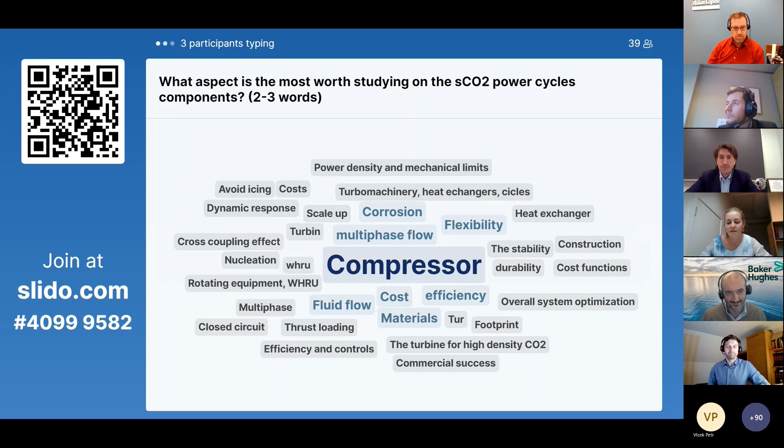For the time being, the cloud looks like a PR for the session, because we see the compressor is the winner, but it's not us, it's you.

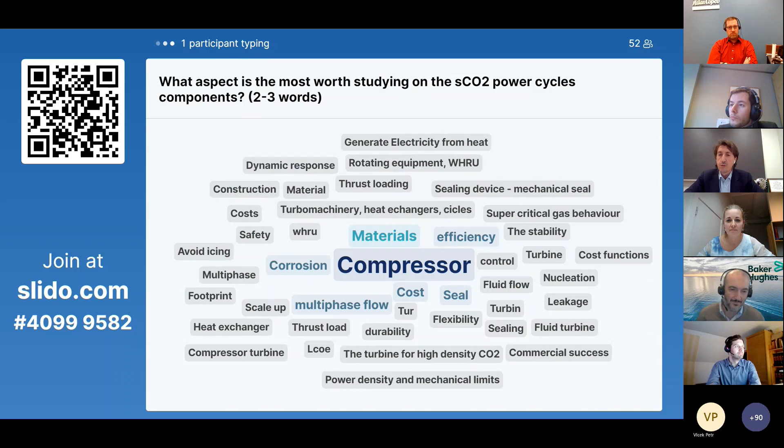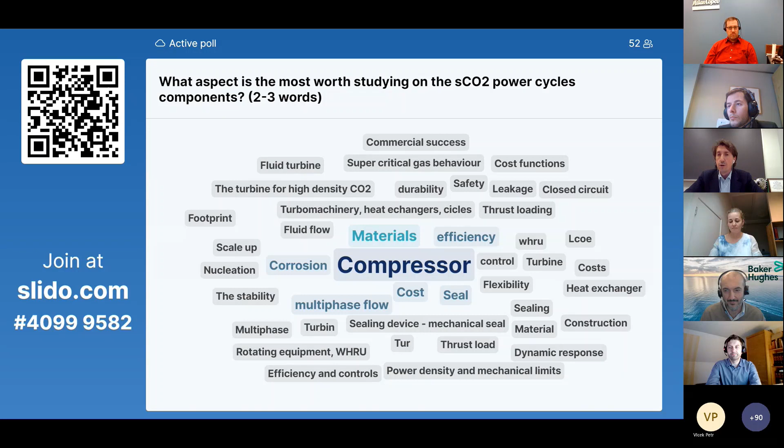My role in this webinar will be to introduce the challenges from the scientific perspective, and to leave the floor to Marco and Rasmus for their industrial experience on that.

It's nice to see that compressor is a big word here, showing that people are very interested in the topic. As soon as you say it's okay, Jitka, I can start sharing my slides.

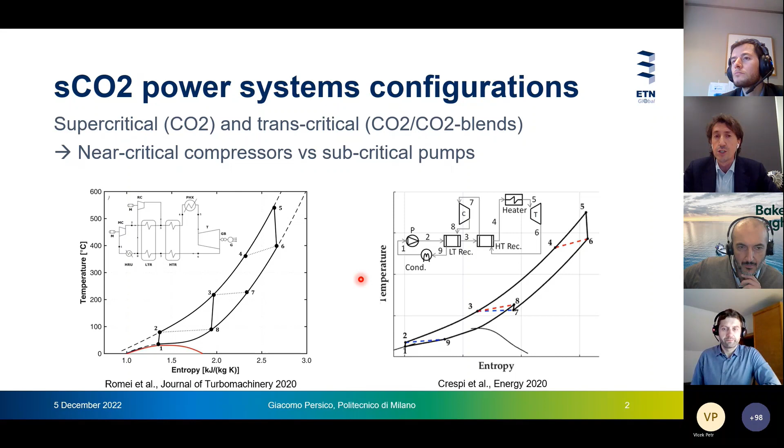The main difference between the two, among many other things relevant for our meeting today, is that in the supercritical case, compression is obtained in a near critical compressor, while in the other configuration, the increase in pressure is obtained by a subcritical pump.

Focusing first on the supercritical case, the near critical compressor configuration is basically a Brayton cycle, single phase, closed. The key idea for the success of this cycle is that compression occurs close to the critical point, reducing the compression work.

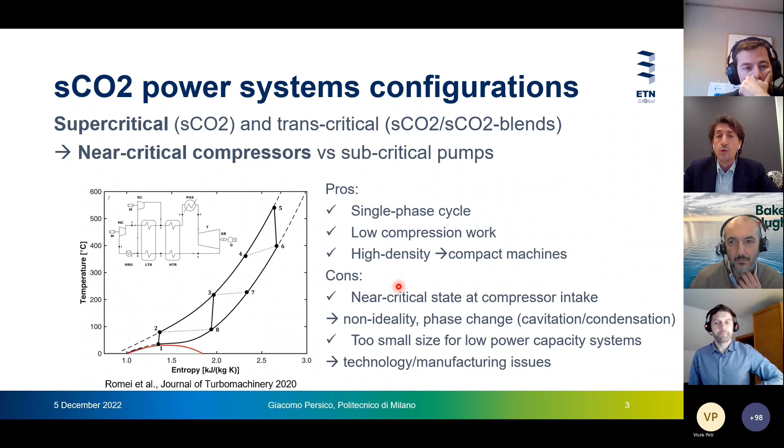This also means we deal with high density fluid, implying compact machines of small size. But this can also become a problem because the near critical state at the compressor intake introduces thermodynamic challenges. Also, in case of low power capacity of the plant, this leads to a very small scale machine, which can be problematic from the manufacturing point of view.

If we consider now the transcritical cycle, it is basically a Rankine cycle. The work to increase pressure is even lower because it is done in a pump, and the presence of a pump offers the opportunity for standardization of the component. Moreover, the use of blends with CO2 allows changing the critical state and extending the application of this kind of cycle also for high ambient temperature.

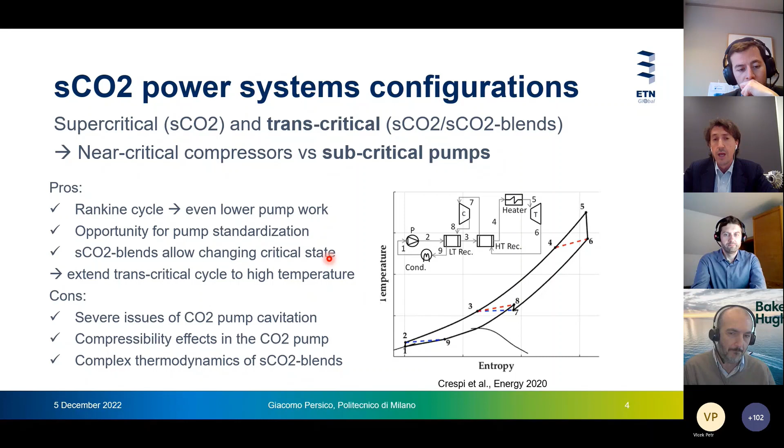However, from the point of view of the cons, focusing on the pump, we can imagine issues with cavitation of this CO2 pump, especially in case of blends, and also compressibility effects. But we will come back later to these aspects.

Let's start speaking about sCO2 compressors, from the basics as much as possible. We are all used to operating with ideal gases that obey the ideal gas law from the volumetric point of view, and whose thermodynamic behavior is summarized in the coefficient gamma, the ratio of specific heat capacities.

However, this parameter for ideal gases is also equal to a quantity which is some kind of an index of compressibility, also called K. But we said that the idea in our case is to operate close to the critical point with the compressor.

Close to the critical point, the thermodynamic behavior of the fluid deviates from the ideal one, and we measure this deviation, this non-ideality, through a parameter Z, which is much lower than one close to a critical point. You can see here the regions where Z is smaller than 1, and it is much smaller close to a critical point. However, this is not the only thing.

In that region, the compressibility index K is different from gamma and depends on the thermodynamic state, growing as entropy reduces. We can even prove that K replaces gamma in the relationship between the head coefficient of a compressor and the pressure ratio of the compressor.

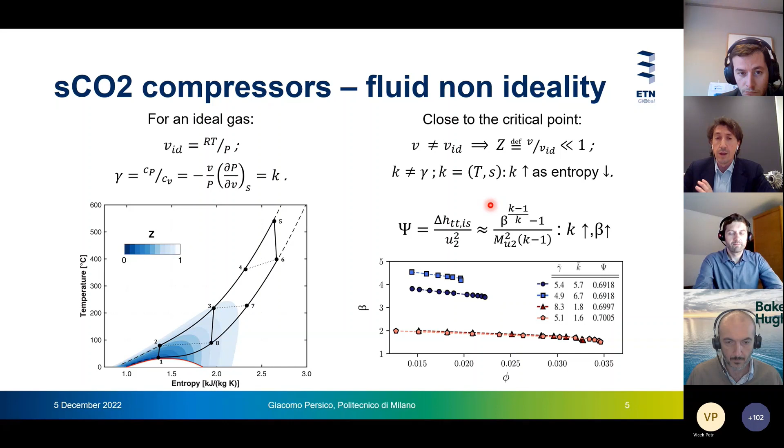We will come back later on this point, but this is not the only thing relevant for these cases, because working close to the critical point also means working close to the saturation curve. In this case, due to local expansion and acceleration at the intake of the compressor, we can have the thermodynamic state dive into the dome, promoting phase change, especially cavitation, or if you start from a high entropy condition, condensation.

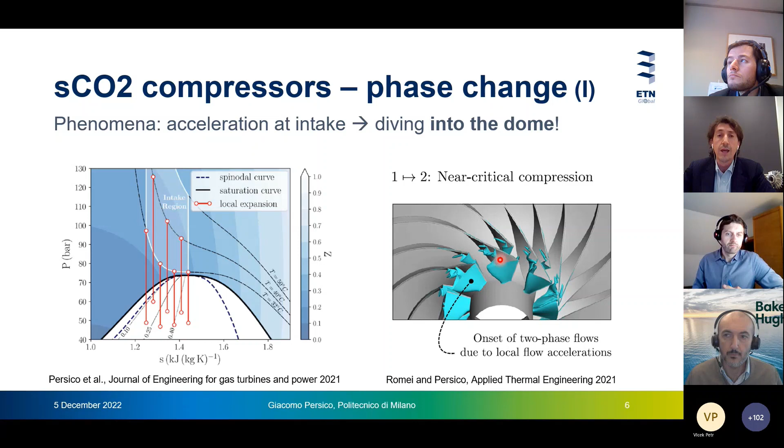You can have situations like this one represented here, with regions of single phase flow and other regions close to the blades where acceleration induces phase transition. Phase transition has a lot of impact from the structural point of view, but also from the thermodynamic and fluid dynamic point of view, because a phase change also involves a huge drop in speed of sound.

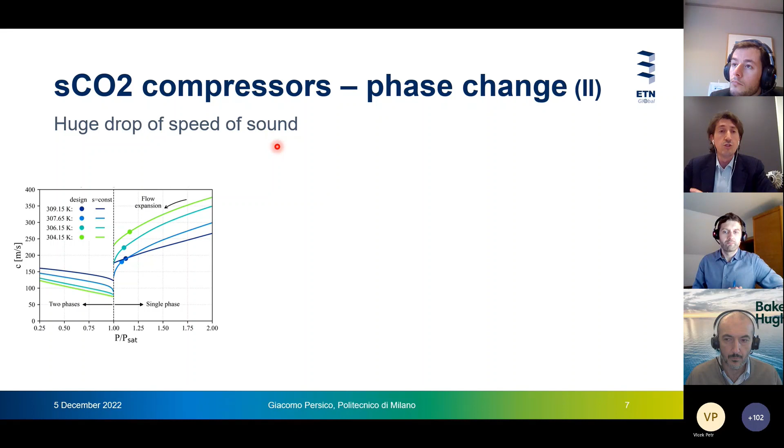This drop in speed of sound creates a huge rise in Mach number and can actually produce anticipated choking, which has an impact on the compressor rangeability.

Here you can see experimental and computational results on 2 megawatt scale compressors tested in Europe and in the United States: the SCO2-FLEX compressor and the Apollo compressor. For both of them, experiments showed a huge change in the rangeability of the compressor, passing from a far to near critical state.

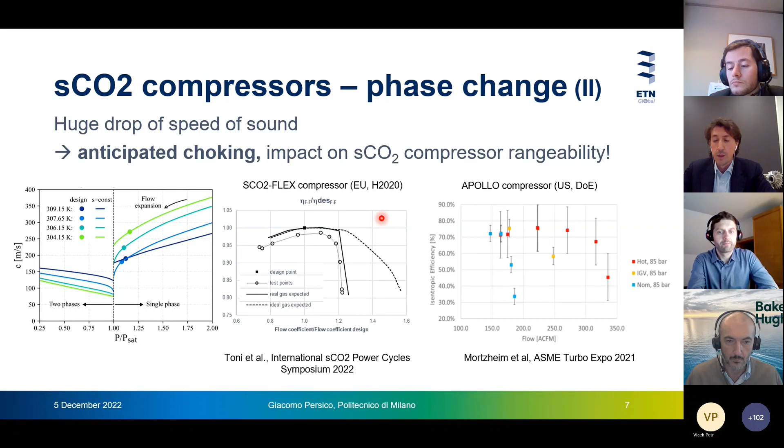So if we summarize all this information, the take-home message is that the thermodynamic state at the intake of the compressor has a huge impact on its behavior and operation from several points of view.

We did, for example, a study in which we considered for a single compressor 4 different operations: on the left, liquid-like; on the right, vapor-like; on the top, supercritical; on the bottom, subcritical. The same compressor operated in these 4 conditions produces very different operation maps and a very different compression ratio.

This is due to the change of the parameter K we introduced before, moving along that area, and to differences in the efficiency of the compressor due to changes in the flow field and velocity triangles, and also a huge change in the extension of these curves, meaning differences in rangeability due to phase change.

So all these things must be mastered when a supercritical CO2 compressor must be designed and operated in practice.

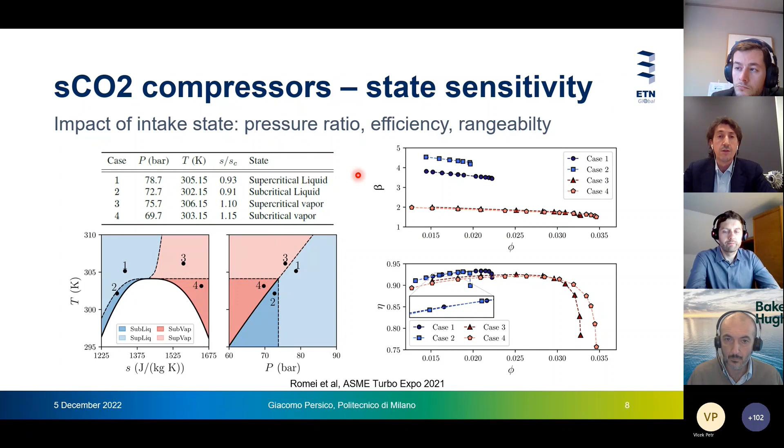However, these thermodynamic aspects are not the only aspect we should consider, because there are also technological considerations to include in our analysis. These things will be discussed in much more detail by Marco and Rasmus afterwards, but I will give you some ideas.

These are basically machines that operate with a fluid at high pressure and low temperature, so they become compact machines operating with low volumetric flow rate. In several cases, the most efficient configuration and architecture is radial, and this even requires specific strategies for low flow-function impellers.

In these machines, we can imagine limited pressure ratio per stage, around 2, and even considering the high density, this turns out to be a relatively acceptable level of mechanical stresses in the absence of creep effects. This allows the use of relatively conventional materials, even though some supply chain issues can occur, especially presently.

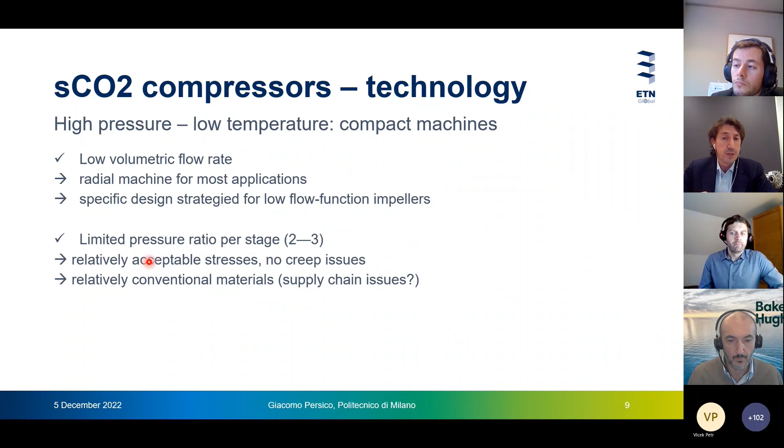But the most challenging aspect is that moving from far from the critical point to close to the critical point, the size of the machine greatly reduces. Because of that, manufacturing issues can arise, for example in the dry gas seals or in the surface roughness.

So the question arises: is there a minimum compressor size that is feasible, and does this produce any limit in the minimum power capacity of a supercritical CO2 system? All this consideration...

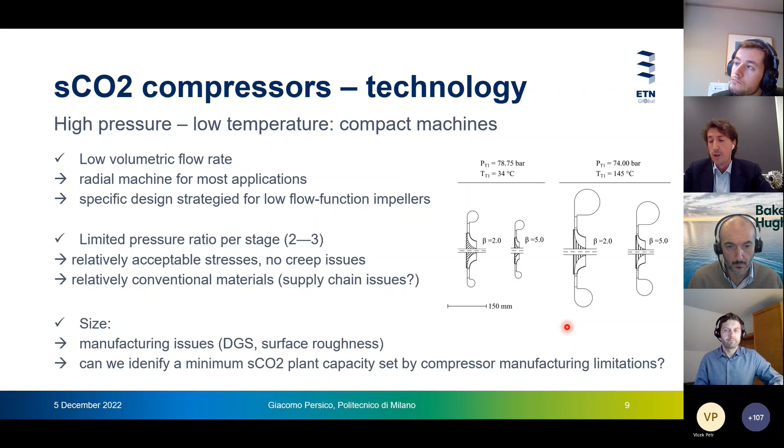leads us towards some kind of possible classification for the selection of CO2 compressors. This was originally proposed in the chapter by Musgrove and Wright in 2017, in which they identified 4 ranges. For power capacity of the system below 1 megawatt, we have very compact, very fast machines.

So the question arises if this is really feasible. For power capacity between 1 and 10 megawatts, machines are compact and fast, but still feasible. This is a very interesting area of application, for example for waste heat recovery.

As we move towards higher power capacity, axial compressors also start to become interesting and relevant, especially above 50 megawatts, and above 300 megawatts it seems that only axial compressors are effective. So the first question is, are these thresholds reliable?

This is something that needs technological research and development, but it also opens the way for other questions. When we think about axial compressor applications and configurations combined with high density of the fluid, the question arises on how these machines, especially the blades, can withstand such aerodynamic forces. Should we think of novel profile shapes, thicker profiles that are still efficient? As a further consideration, when the power is so high, could it be more interesting to consider pump-based transcritical cycles, since they inherently don't suffer from this scale effect?

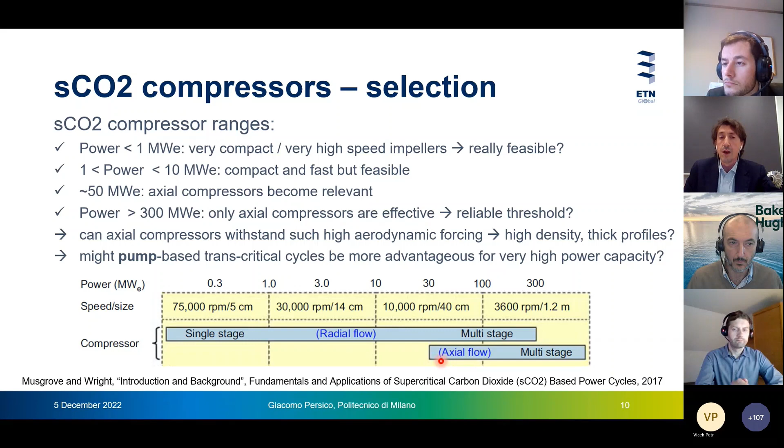This question leads us toward the discussion of the challenges about pumps operating with CO2 and CO2 blends, which are devices that can be quite different and more complex with respect to the CO2 compressors.

They operate with a sub-critical fluid in liquid-like thermodynamics and still have issues of small size. Focusing first on the thermodynamic aspects: yes, they are liquid, but in a compressible liquid condition. Issues can arise thermodynamically since the machine operates in a region not very consolidated, especially for CO2 blends. Also, change of phase can occur here, but in a different way.

With respect to what we've seen for compressors, cavitation can occur in both, but for CO2 pumps this cavitation is different because the fluid condition is subcritical. The specific volume of the vapor is much bigger than that of the liquid, and the bubbles are not dispersed, so their implosion can become critical for the resistance of the material.

We need to develop criteria to avoid cavitation, but this requires more research, especially for blends that have novel thermodynamics. From the technology point of view, pumps also share the problem of small size, so the same question that arose for compressors applies here too.

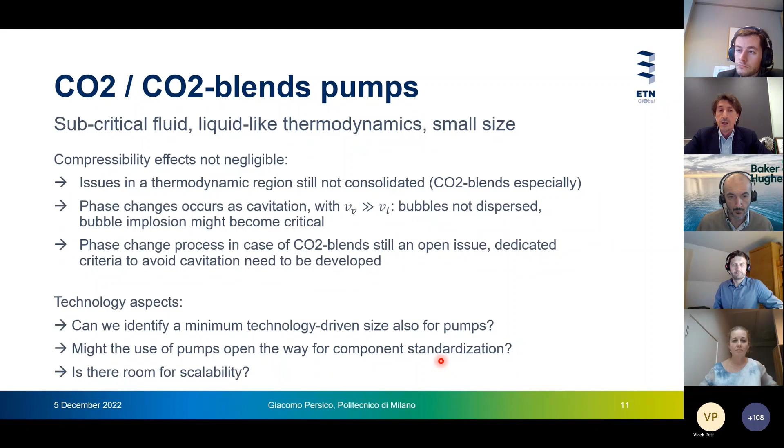What is the minimum size? But we should also consider that from a techno-economical point of view, pumps offer opportunities for standardization and scalability. These are both aspects that should be explored in the future.

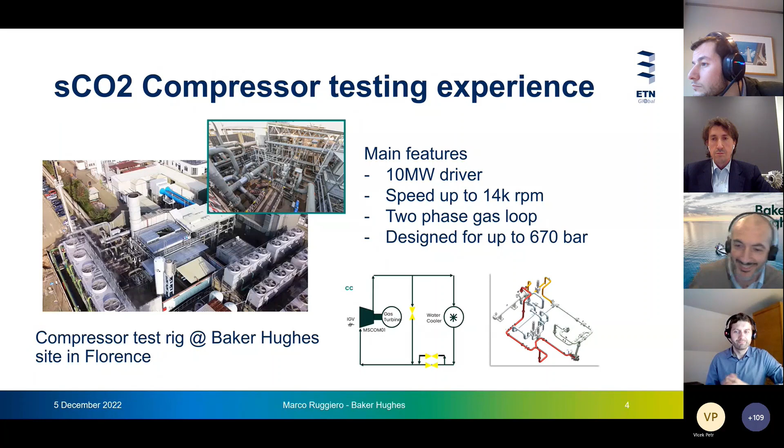So the compressor that we tested had a couple of features very innovative for the type of CO2 compressor we were used to seeing. The first being that it had a stacked rotor. This is something we have done before, just to mention one of our other products, the high pressure ratio compressor, which has a stacked rotor using Hirth connections. But for a configuration like this barrel type compressor, it was the first time we did it.

It was also interesting to see how it played out, especially looking at leakages for a compressor which, even though it's 5 megawatts, is overall rather small — how the leakages through the rotor and the tie rod would play out.

We also have a variable geometry IGV, which is not entirely common in this type of compressor. This was done to fulfill the idea on the project to achieve a very large operating range for the compressor. This would be achieved by using IGVs and the variable speed motor. Using a combination of the two let us get in between 20% and 100% of the operating range of the compressor.

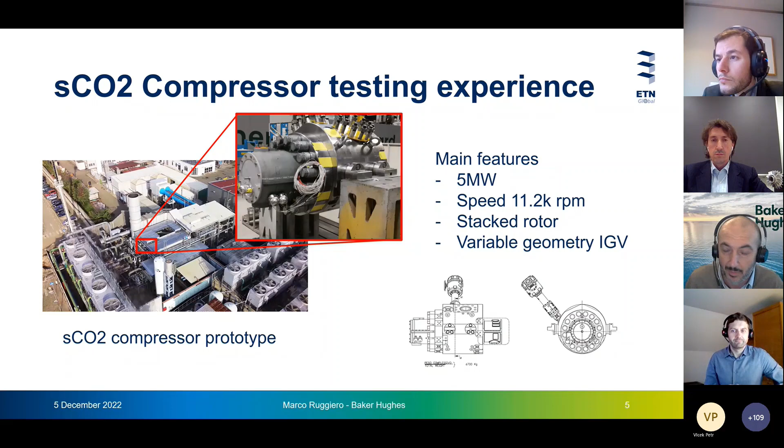So what did we learn? We learned that the suction control temperature is critical — this might be something already known, but even variation in ambient temperature due to the time of day is critical. There is an inertia in the cooling media. We used water mist type coolers, and it was not very hard or impossible, but took some attention to maintain conditions, as a small swing in temperature can have a very large swing in density, meaning you go off the map as you operate the compressor.

Giacomo mentioned the modeling we've done together for the CFD simulation. The results from the extensive campaign did really agree a lot with the theory behind those simulations. We're pleased that we not only now observe the behavior, but also already have a model for it. This kind of predictability is what we always look for when designing new stages for a service like this.

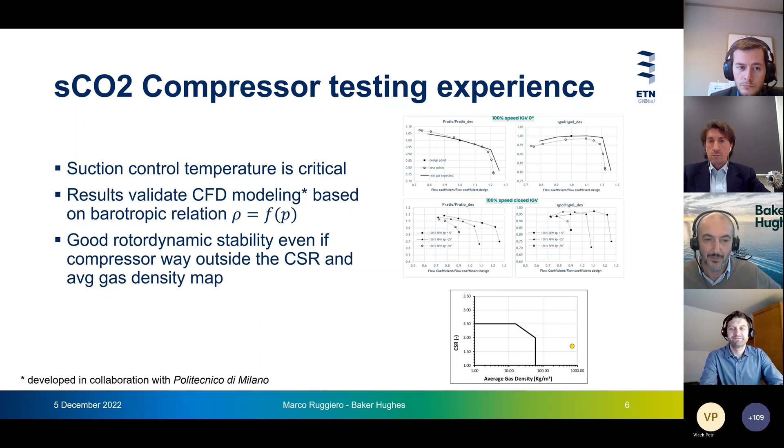So what are the challenges? What we see as a challenge for a Brayton type cycle is maintaining compressor inlet temperature, not only through ambient changes but also load changes, as the cooling media inertia or the exchanger itself might lead to transients that take you away from the point of optimal efficiency.

There have been proposals to use density as a controlling parameter instead of pressure or inlet temperature, but so far the ways of measuring density with accuracy in such conditions are very limited. That's one challenge that we, as a compressor manufacturer and operator, would gladly welcome a solution to.

The effect of saturation condensation that Giacomo described, during the design phase, forced us to develop a new aero configuration which also includes splitter blades to address and ride out the effect, and be able to properly design the performance of the unit.

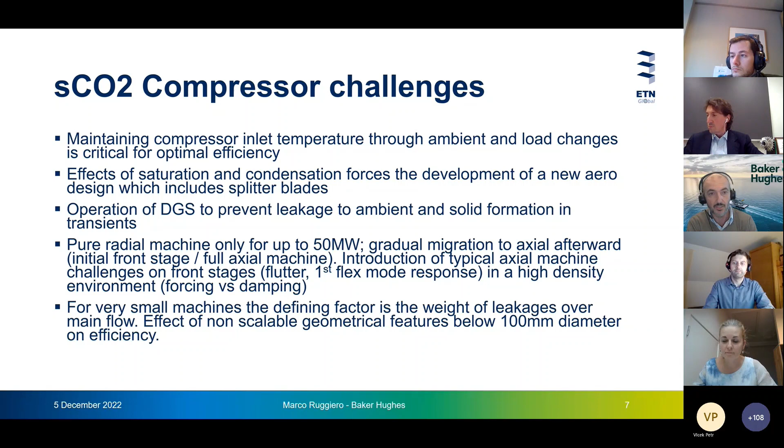Marco, I need to say that, but I'm afraid you'll need to conclude. Yeah, okay.

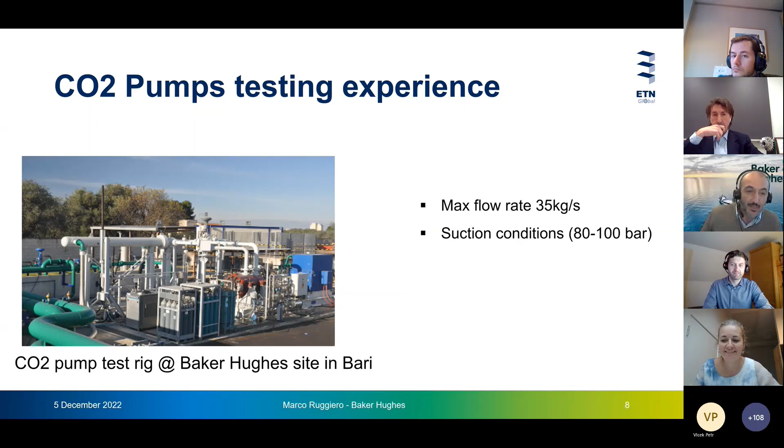So let's look at the pumps. Pumps as an item still have a not well characterized EOS in the liquid-like region, which makes it challenging in designing. There is a high density variation through the pump, and that's also a challenge for the pump itself. Inlet conditions need to be properly designed in order to avoid cavitation, which might be catastrophic for this type of machine.

For scalability, we see an upper limit of about 1500 cubic meters per hour as a volumetric flow due to size and forces, but also a limited scalability downward below 300 specific speed, as we change type of pump, basically it becomes a volumetric pump. The same applies for non-scalable geometric features below 100 millimeter diameter.

So the conclusion is that we have consolidated experience in SCO2 pumping. I didn't mention it as I jumped on the slide, but this is a typical application for enhanced oil recovery. We have been producing this type of pump for a while, not for blends, but for pure CO2, yes. So it's something that's on the market, and something we have experience with.

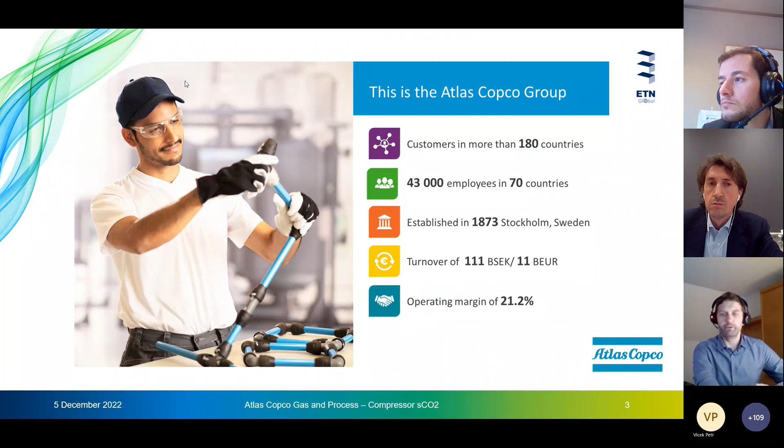Atlas Copco has a pretty wide product offering, from mobile compression, to vacuum technique for the semiconductor industry, to air compressors that probably everybody knows. We are part here of the Atlas Copco Gas and Process division, meaning we're the tailor-made equipment suppliers, let's call it the retail store.

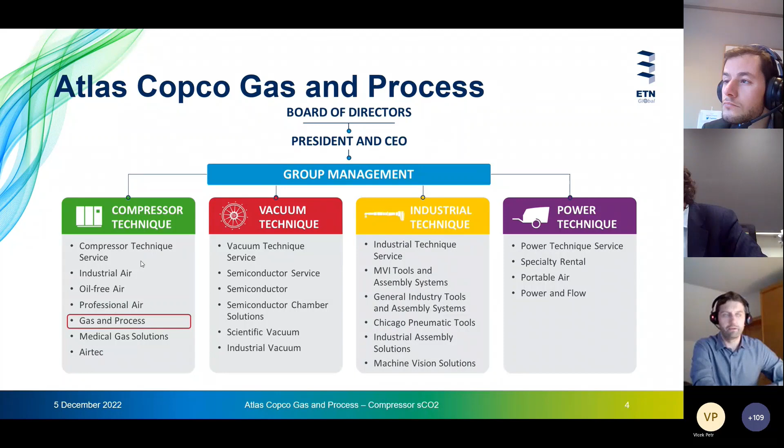Okay, so we learned already a thing or two about sCO2, and especially when the previous speakers were mentioning the differences between sCO2 turbomachinery design and normal machines, you can get this by comparing sCO2 with air at the same pressure and the same temperature. So just say 74 bar, which is slightly above the critical point of CO2, 31 degrees Celsius. Then the air has a density of 85 kilograms per cubic meter, whereas the sCO2 is at nearly 500. So this means roughly 5 to 6 times heavier.

And the second nasty property of sCO2 is the fact that it can diffuse into elastomerics. And once it's in there and pressurized, and you depressurize the system, you can have explosive decompression.

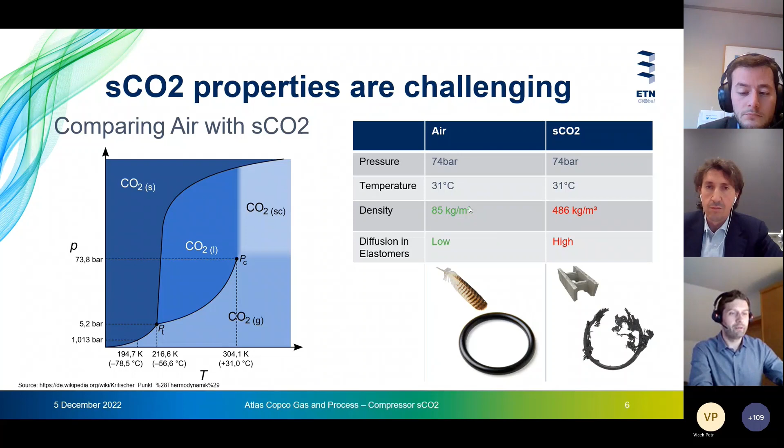This is something you want to avoid, because otherwise you have to replace your static sealing elements every time. So air is like a feather, and sCO2 is more like a brick. The properties for these elastomerics also have to be very finely tuned.

So we learned already by now, it's not just another gas. If you compare the typical turbo compressors and expanders we do, and other suppliers do, with sCO2, you see that our machines average from 0 to 50 bar, while the sCO2 machines would go from 30 to 300 bar and even beyond, as Marco just said, 600 bars. That's something you need to have for the system to operate efficiently.

Temperatures can be low on normal machines, but with sCO2, especially in waste heat to power systems, they will be really high because, again, Carnot's law: the higher the temperature, the higher your efficiency. Power is comparable, but at the same time the impellers, as we already learned, will be much smaller on the sCO2 because the density is higher.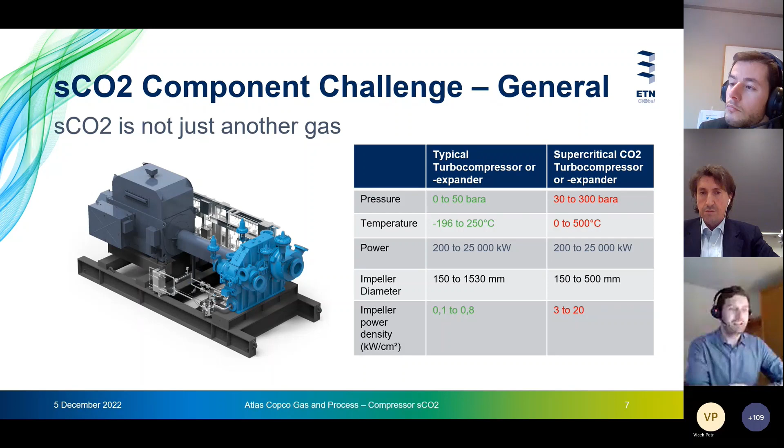Something I find pretty handy to imagine: if you take the diameter of a normal impeller and the power rating of this impeller, and divide it by the square centimeters of it, you get the specific power rating of the impeller. Even on high power air compressors, it goes up to 0.8 kilowatt per square centimeter, while on high power sCO2 expanders, it goes up to 20. So this is more than an order of magnitude more, and it shows you what a strain, and what tremendous power, sCO2 can bring.

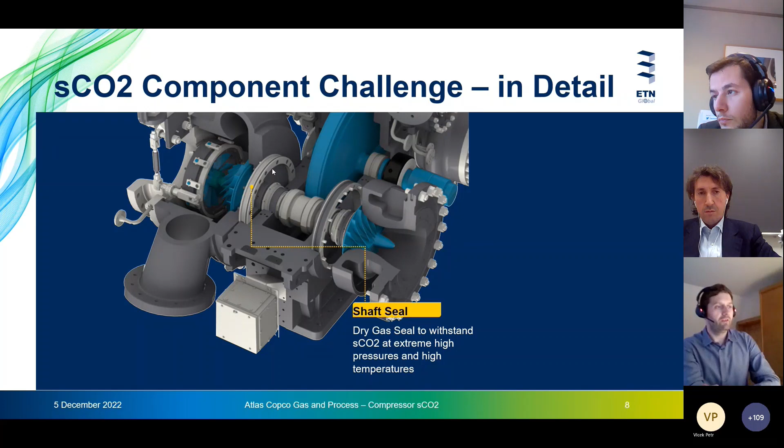This, on the other hand, brings many challenges to the whole hardware of the machine. Looking at the shaft seal, it needs to withstand those high temperatures and pressures. The volute of the housing, or the housing of the compressor, needs to be capable of the high temperature, pressure, and cyclic loads. If it's a small machine that needs to run daily start-stop operation, you have to consider fatigue and everything.

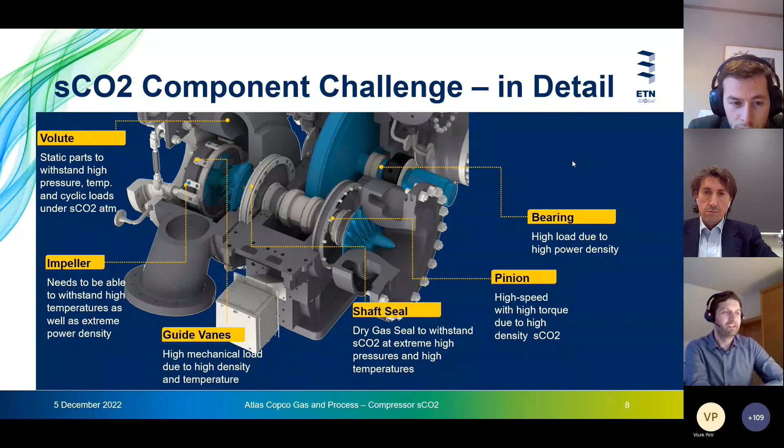The impellers need to withstand these high temperatures as well as this high power density. A lot of power on a small impeller means high torques, high strain, and everything combined with high tip speed — that's a nice recipe for a challenging machine design. The guide vanes, of course, high density means high load on that. The pinion needs to be capable of the high torque, and the bearings need to hold everything together. So you have a nice variety of challenges.

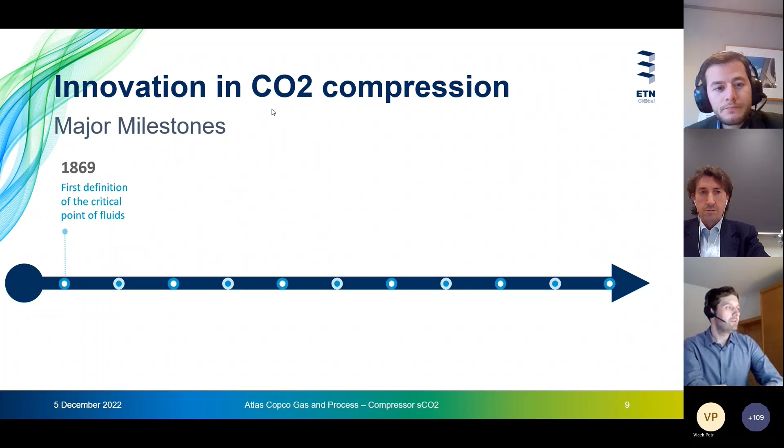But it's not the first time we are doing CO2 machines, or that the industry is doing it. We just learned there is a full-size, full-power compressor by Baker Hughes, and I won't go down to every detail. The sCO2 compression and usage in industry already has a bit more history, going down to the discovery of this critical point, and the first full-scale commercial process utilizing sCO2 for making urea.

Then the first use of these integrally geared compressors on the radial design, the first use of a dry gas seal — also a critical component for this machine — and then the first large integrally geared compressor with intercooling for CO2 compression.

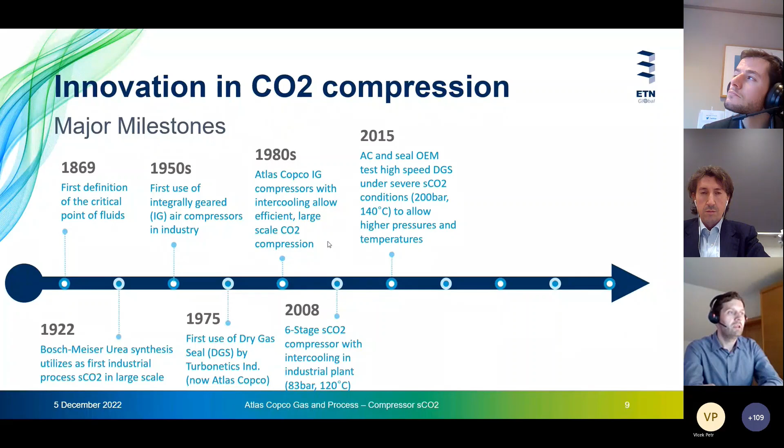And then the first time we crossed the border of supercriticality, in 2008, with a 6-stage compressor going to 83 bar, and then going into the development of high-speed dry gas seals under severe conditions together with an OEM. To the next stop, the 8-stage sCO2 compressor up to 200 bar, compressors for oxy-fuel power plants like the Net Power plant in the US, also using sCO2 as a power cycle fluid.

Development of a small size waste heat recovery compander for the smaller power rating, to leverage these nice properties of sCO2 in compact machines, and so on. And of course, now going the other way, also using this fluid for heat pump purposes.

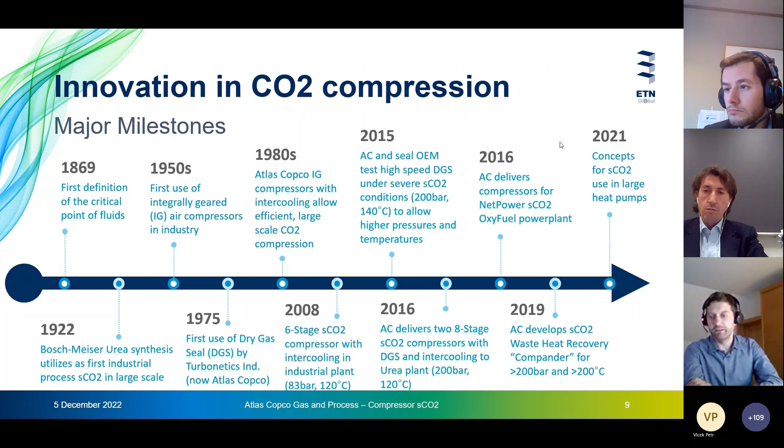To find out how it all fits together, you can calculate, but you also have to do R&D activities. So, like Baker Hughes, we set up a test stand and tested in our facility the dry gas seal in collaboration with the seal OEM, in a special mock-up. The target was to qualify these dry gas seals for the severe conditions in supercritical CO2, larger than 200 bar and 200 degrees. After that, we learned some very useful lessons and implemented that into the first commercial project using this 8-stage compressor going up to 200 bar.

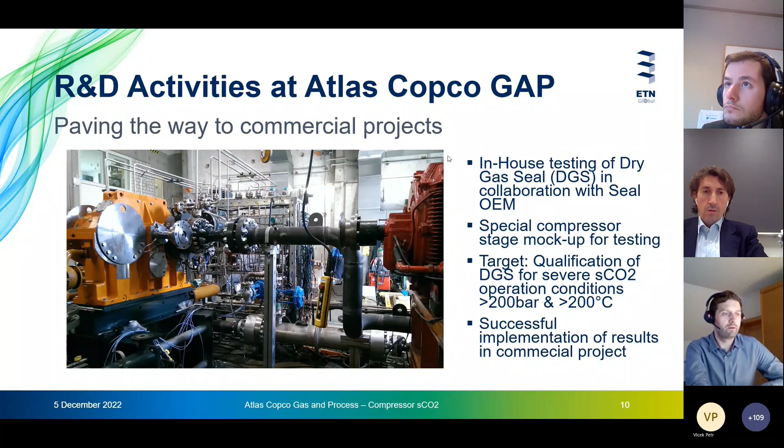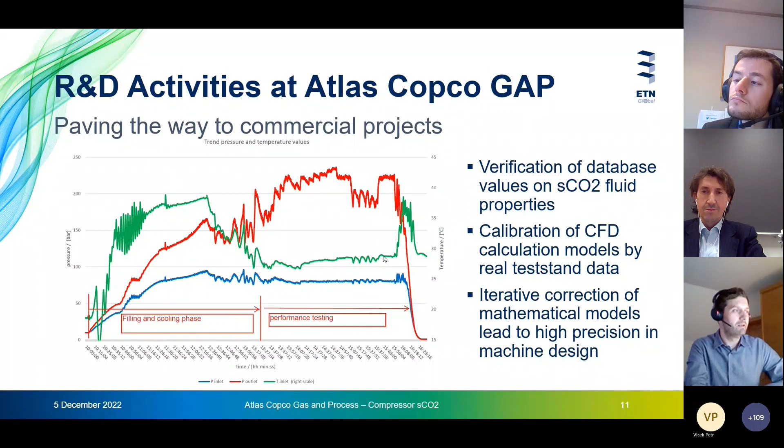Another experiment we did was simulating the behavior of sCO2 around the critical point, and we verified that as well in the test bed. We used this data output to calibrate our CFD and our database, so we have an iterative correction of our mathematical models, and this leads to more precise predictions. Same as Marco said, we like it if we can predict something before it happens, because then we are much more secure that everything will work out the way we planned it.

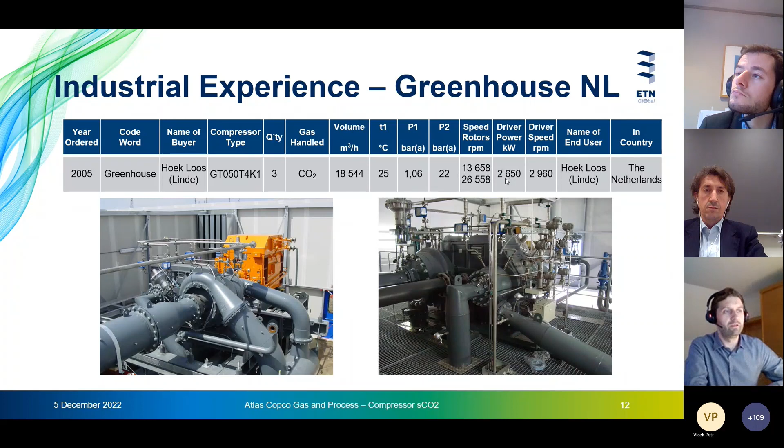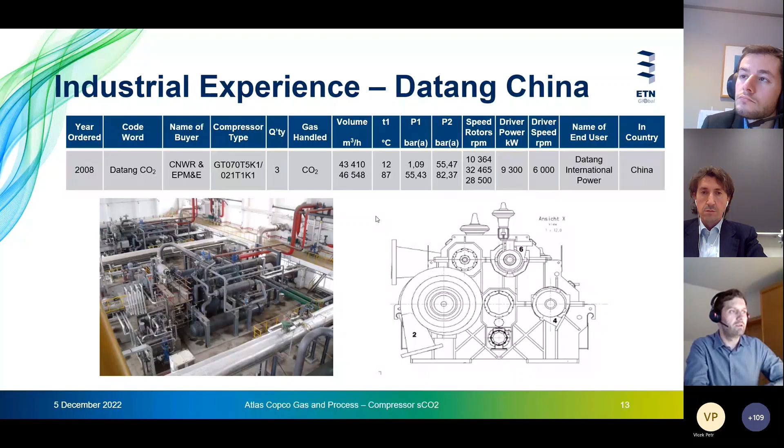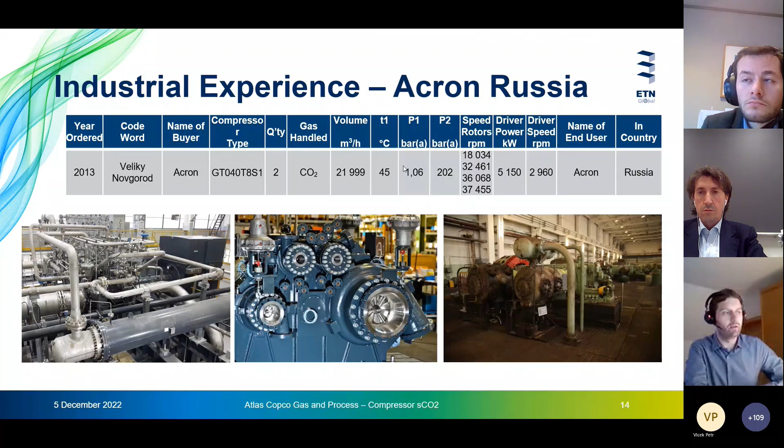This is the machine that we tested the seal for, and this is going into an urea process in Russia, and it's bringing the CO2 up to 200 bar. So this means it's really all in. I think the last 2 stages are supercritical.

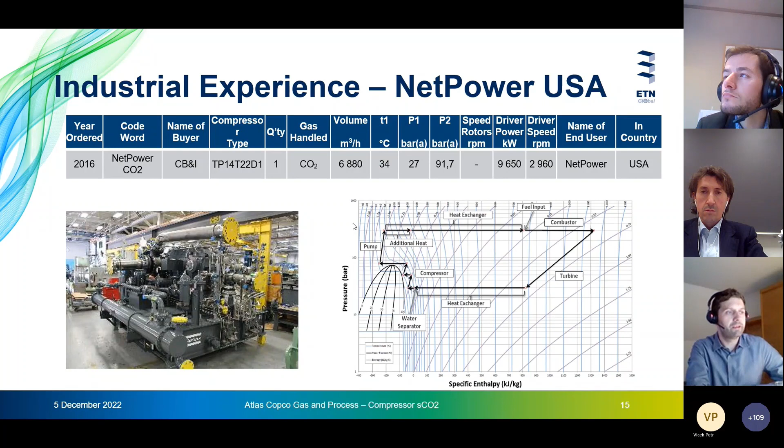If we would reverse this whole process, just think about this: if you want to get heat out of a low-grade source, then you need to invest electricity or driver power in this. And the reversal of these processes is then just called a heat pump.

sCO2 has some nice properties when used as a refrigerant in a heat pump. That is the same beneficial aspect, the high power density. And because of this high power density, you can end up with systems delivering up to 50 megawatts of thermal output per system.

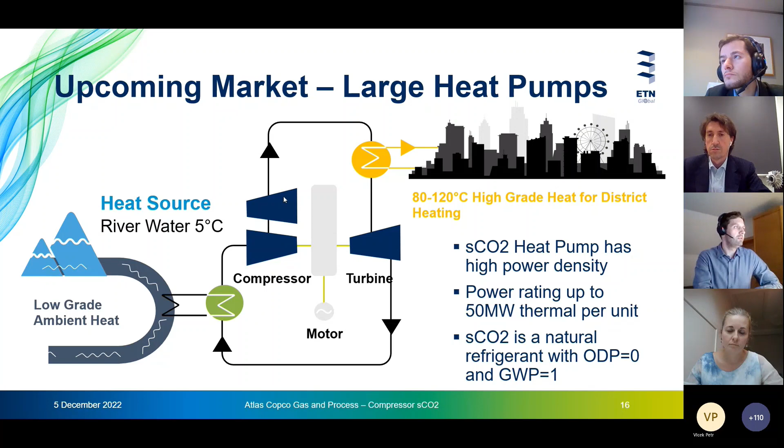At the same time, sCO2 has some useful aspects as well: no ozone depletion potential, and CO2 is the benchmark for the greenhouse potential or global warming potential of these refrigerants. Pressures are also in the normal high range, 200 to 300 bar, but we can reach very high temperatures from very low heat sources. So when Europe needs to decarbonize now to end dependence on the import of fuel, we are one of these cornerstones or pillars, maybe a large-scale heat pump as well.

Summarizing everything, for us as well as for the rest of the hardware and rotating equipment industry, the thermodynamic and fluid properties are the challenge. It's all about predictability, knowing what you deal with. So learning our lessons together with other colleagues, finding out the right materials, refining our current material selections, what elastomeric materials may be used to what temperature and pressure, what metals can be used for what, and improving performance of the sealing systems, especially lower leakages, higher operating temperatures and pressures.

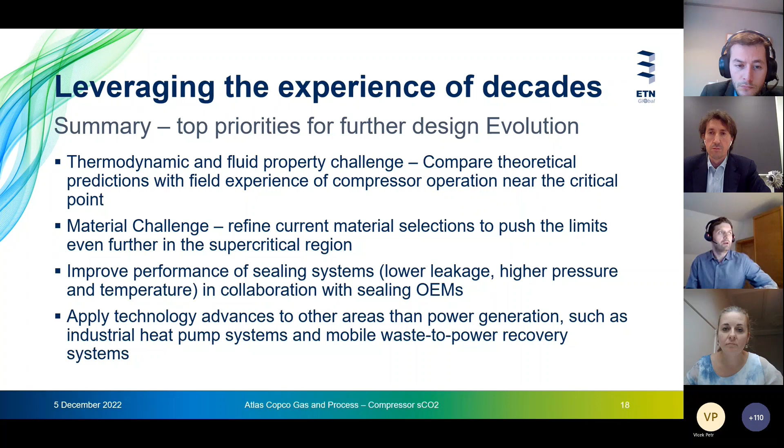Reducing leakages means you have higher efficiency of the system, and then you apply all these technologies you learn in one sector to the other sector, to have leverage effects so that a heat pump will also profit from the new things you found out for waste heat power systems. That's it for my part.